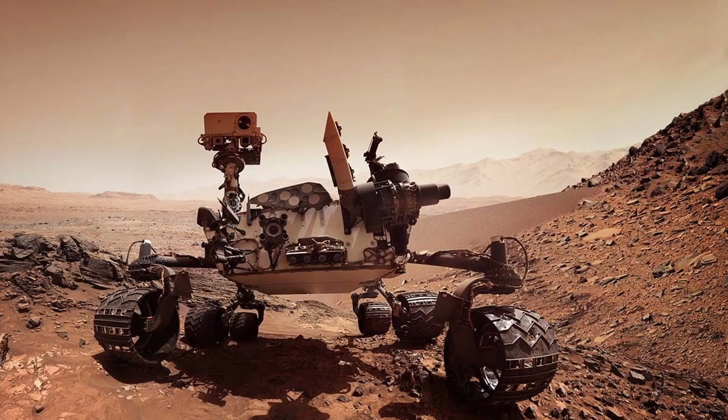Rovers. Everybody knows them, everybody loves them. But how do they actually move from A to B? Let's look into it. Alright, let's say we have a rover standing currently on an arbitrary point A and we want him to move to point B. On a higher level, we can just tell him, okay, go to point B somehow.

But there's a little problem. Let there be a rock in the middle. And now we cannot just drive straight to B. So what we need is continuous processing of our real-time environment, and we always have to weigh between accomplishing our mission goal and reacting to our environment. Also, this has to be instantaneous, so we cannot do it with humans. For example, look at Mars, we already have over 20 minutes of round-trip time for a message.

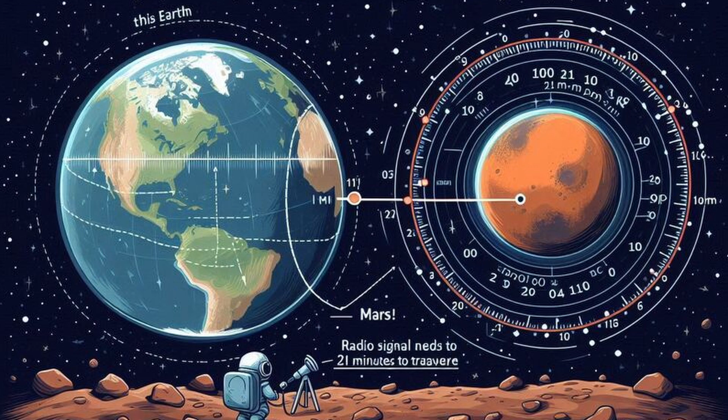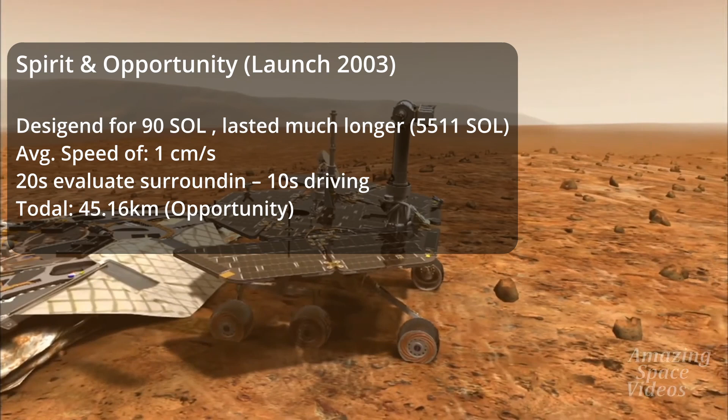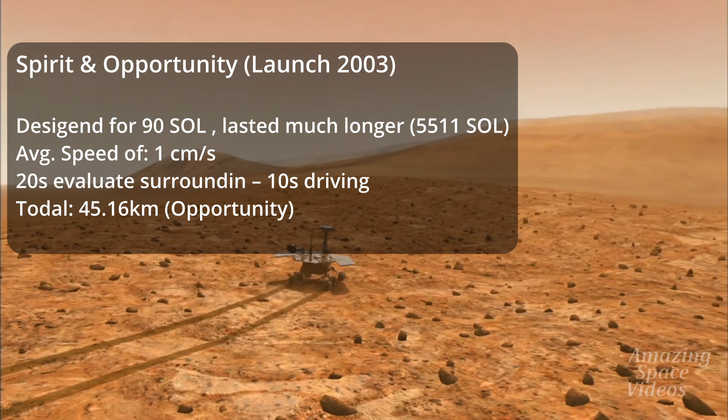Before we go too deep into the topic, let's look at a quick example. Spirit and Opportunity, launched in 2003, were designed for only 90 sols, but lasted much longer, actually over 5,000 sols. They moved with a pretty slow speed of 1 centimeter per second. It was split into two phases. First, they took around 20 seconds to evaluate their surroundings, and then they were able to move for 10 seconds.

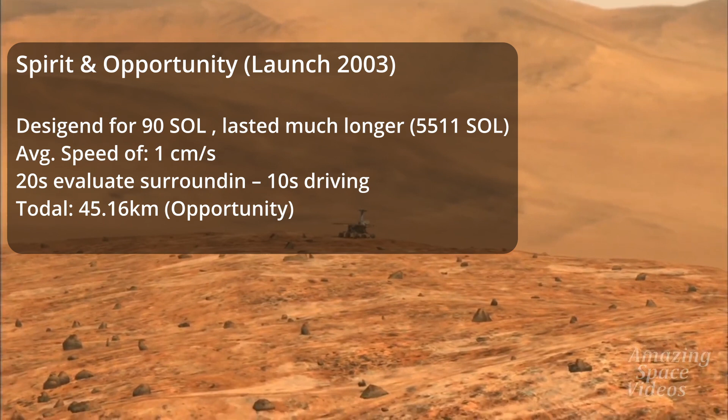And in the case of Opportunity, we actually managed to get to a distance of over 45 kilometers. So the system we design has to be reliable and work in the long term. We will start with the actual steering mechanism on how you can control a rover. First of all, we want to look at skid steering, which is a very basic version of steering. You all know this from tracked vehicles like Wall-E, for example.

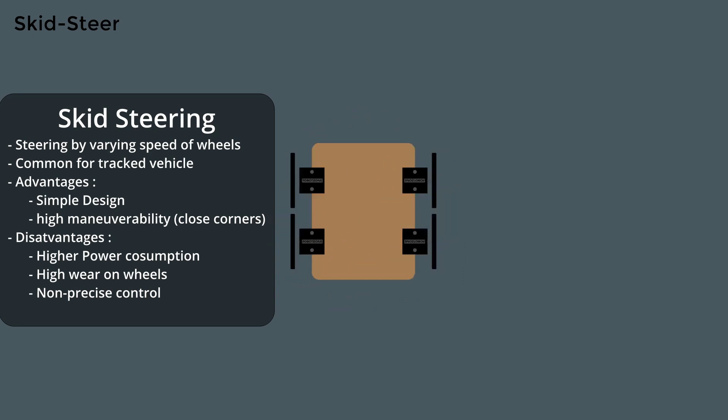What we do here is we steer with how much we actually use which motor. So if we want to do a right turn, we give more power to the left motors and less power to the right motors, or in extreme cases, let the left motors roll to the front and the right motors to the back, so we can do a turn in place. The advantage of this design is that it's very simple and that we have very high maneuverability in close corners because we can spin at one point.

But, and that's a big but for our problem set, we have a high power consumption. Power is rare in rovers. We have a high wear on wheels, which is especially bad because we cannot just go there and swap a tire. We have one tire for the whole mission, so we want to reduce that as far as possible. And also we have not really precise control if we want to go to a very specific point to do a measurement, for example, on the floor. So it works. It also was used in some rovers, but there are better options.

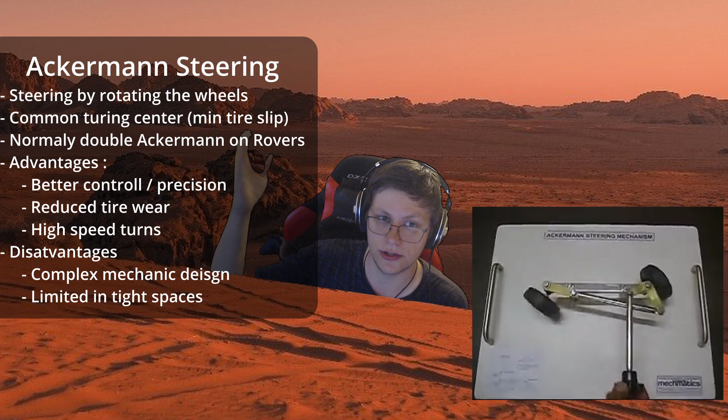The most common option, and arguably better than skid steering, is Ackermann steering. You all know this. Why? Because it is also used in cars. What we do there is we steer by rotating some wheels. Let's look at an example. In the car we have our two wheels on an axle, and if we turn our wheel, the wheels rotate to the left or to the right, and with that we can steer. This system allows us to have a common turning center. This gives us minimal tire slip, but on rovers we have two special cases.

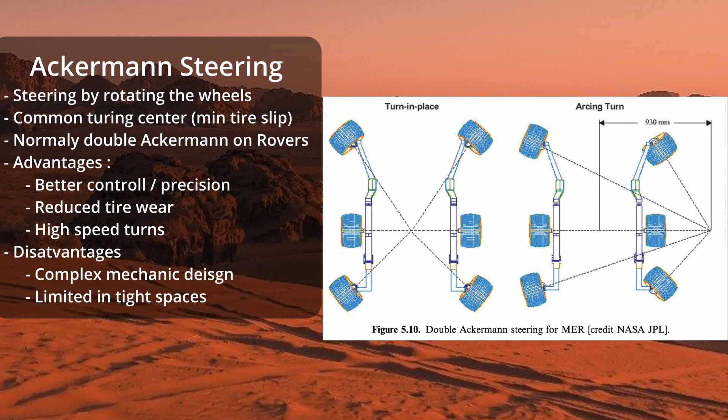First of all, we don't use a normal Ackermann, we use a double Ackermann. So we don't rotate one pair of wheels, we rotate two pairs of wheels, on front and on back. This allows for even better movement and tighter turns. And the second part, as you can obviously see in pictures of rovers, we do not have an axle to connect the wheels. This means we have to simulate something like that in software, but it also gives a very big advantage that we can independently move the wheels and basically rotate around ourselves and put the center of rotation inside of our rover, like seen here.

As already said, the advantages of such a method are better control and precision, way reduced wear on the tires, and very high speed turns. But as obviously seen, it's a little bit more complex in mechanical and software design, and we are a little bit limited in tight spaces. Yes, we can rotate around ourselves, but not as well as with skid steering.

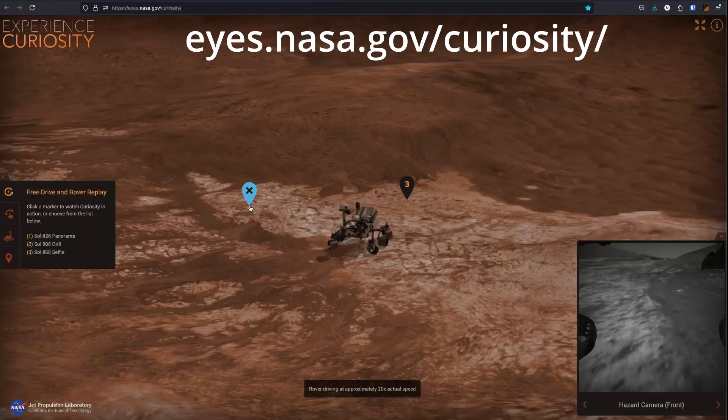Now, if you want to try this out for yourself, there is a very cool NASA website where you can play around with one of their rovers and actually point and click it to a location where it should go. And you can see in action how the Ackermann steering works.

But wait, there's more. As we all know, extraterrestrial terrain is not as flat as a street. So we actually need a mechanism to be able to always stay on the ground and not just fall over. For that, we can use something like the bogie mechanism, which is basically a suspension system with two joints where we separate some of the wheels from each other to be able to keep all of them on the ground when we go up or downhill.

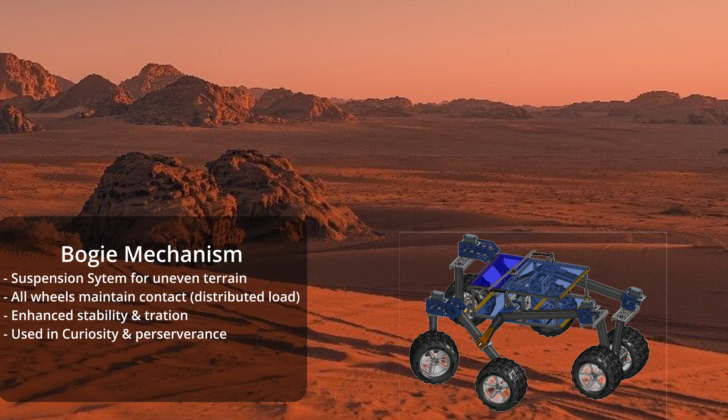It enhances the stability a lot. For example, it was used in Curiosity and Perseverance, and as you can see in this animation, it works actually pretty well. With that, your rover will not just fall over when there is a small hill.

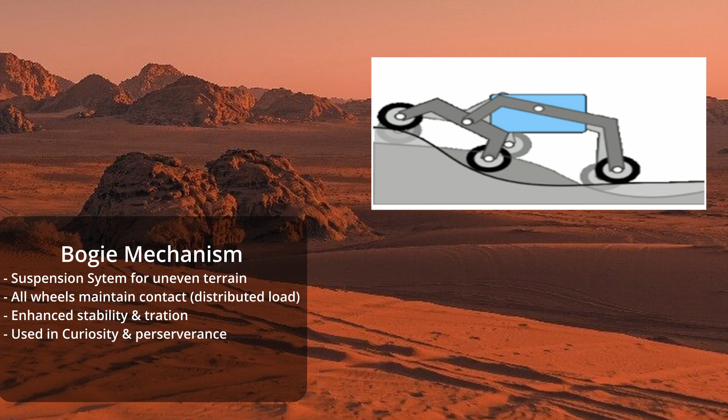Now that we know how the hardware works, let's take a closer look at the software. For that, you should know what a closed loop system is. Basically what we are doing is we take the output of our system, analyze it, and adjust our input according to the error we have in our system. This gives us better accuracy, reduces disturbances from errors, and enhances our stability.

Also important to know is that we have more than one of such a system. Just for controlling our movement, we use one for our speed controller, how fast we are going, and one for our steering on where we want to steer. And also, these are not only used in locomotion, we also use them in temperature sensors and all such stuff. But this is a topic for another time.

The first type of these controllers I want to look at with you is the Bang Bang controller. It was one of the first control software systems that were used. And basically what we are doing is we are switching between minimum and maximum control input. So if we are a little bit too low, we set our input to max to get it back up. And if we're a little bit too high, we set it to 0 to get our system back down.

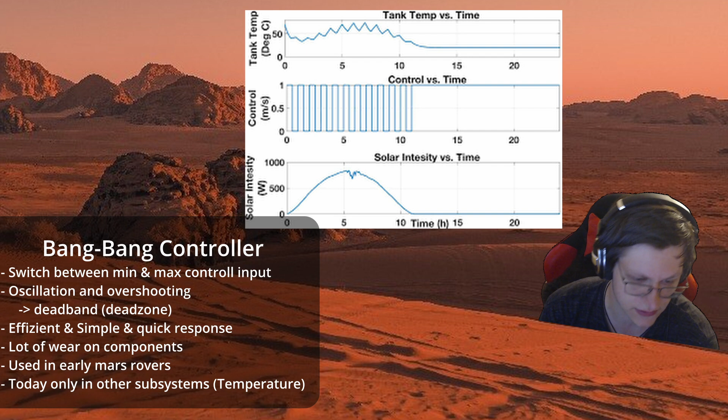This is very efficient and very simple to implement, but has some major drawbacks for our scenario. We have a lot of wear on our components. These maximum minimum control inputs are not really good for motors or any kind of actuators if you want to run them for a long time. And today they're only used for some other subsystems like temperature measuring and no longer for locomotion.

Then we have continuous control, where we always look at our output and adjust it in very small steps continuously. Hence the name. This results in a very smooth and steady movement, and we can handle very small deviations in real time since we are only doing this in very, very small steps.

It has way less wear on the gears and very accurate navigation, but has the big drawback that you need a lot of computational power to compute what you want to do, and it's kind of slow in the response, so it's better but not perfect.

And going one step further to the PID controller, what does that stand for? Proportional integral derivative, where we look into the past, the now and the future. We can look at the current error, where are we and where do we want to be with our output of the system. But also we can integrate over old errors to compensate errors that accumulate over time. So that's our past part.

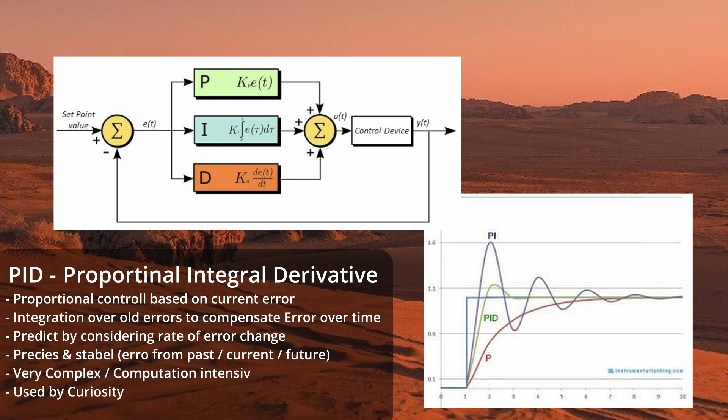And then the third part, where we can look into, is we can predict what our error could be by considering how the rate of error changes right now. This is very precise and stable, but also even more complex and power intensive than the previous one. In the end, this is the system you want to go to for current rovers.

For example, Curiosity uses this. Comparing the power you need to move the wheels and the whole rover to computing the movement, the computing part is negligible. The only important part is that you need hardware microcontrollers on board that are capable of calculating this fast enough, so you can run it in a way that you can proceed with the mission.

Moving to error detection and recovery. How do we even check if we have an error in our system? I mean, yes, we have our sensors and the feedback from them, and we can compare the is and the should. And with that, we can basically set up an error threshold. So we define a space where we have to be around our should, where we say, okay, this is fine, but if we go out of this threshold, we have to do something.

And on the other side, what we can do too is data analysis. So we have to check if a faulty sensor exists, so the values we get from this one will be wrong forever, or if it's a problem in the controller where we can fix it software-wise, or is the actuator broken. So for example, when one of my wheels is broken, I will never be able to move as I should.

And then there's the other part where we cannot recalibrate the sensor or some of our components are stuck. That's what we call an unexpected situation. And this is the point where the autonomy of the rover stops and we actually need a human to interact with it and help to fix the problem. For that, let's look at the worst case scenario.

So, what do we do if we have an unexpected failure in our system? For example, a stone or stuck in sand. First thing we want to do is hold all the processes we are running right now and identify the problem. And with that, we request human interaction, because the rover accepts that it no longer can do anything to better its own situation. And it starts collecting more and more data so people on Earth can analyze the situation as well as possible.

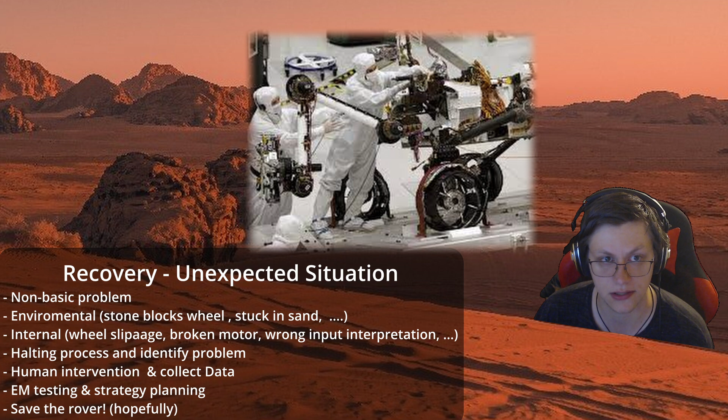And with that, you can start engineering model testing, so basically a replica of the rover on Earth to simulate the situation and see what we can do to fix this and hopefully save the rover.

Let's look into a worst case scenario, the Spirit rover. 2009, the rover was about 6 years on Mars at that point. The rover drove over a not so stable crater and broke into it. And in there was a lot of sand. And basically what happened, the whole rover was stuck in sand and could no longer move forward.

People from NASA tried to save the rover and did a lot of calculations. After 6 months, they tried the first rescue, but they could only move the rover a few millimeters. At that point, another problem was adding to this bad situation. The Martian winter was coming, so basically less and less sunlight for the rover, less and less power to do

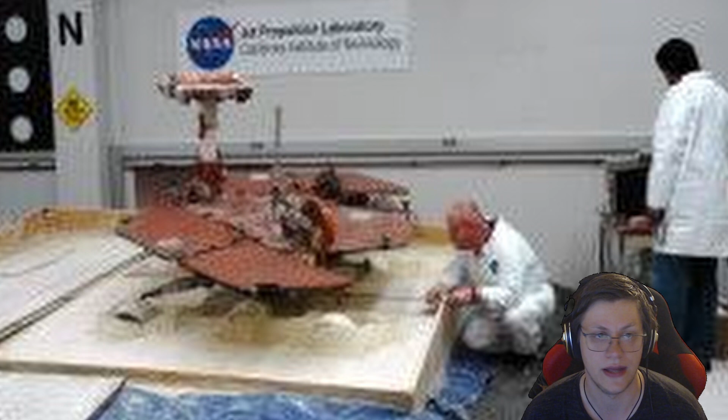stuff. So at one point it was decided to make the best out of the situation and use the rover as a stationary science lab to do as much science as possible. And the last locomotion thing that was done on the rover was to move it a few millimeters, just to get a little bit more sunlight on the solar panels to get more energy into the system to do experiments.

Again, this is a worst case scenario. Normally you have a high chance to fix such problems, but in this case we only had 4 working wheels left, and we have a rover that was like 6 times as long in active duty as was planned. So I personally still see it as a win that we can use Spirit as a stationary science platform at that point.

Okay, but now to a bit more fun part. Let's talk about odometry, which basically is the science of knowing where you are without external input. On Earth that's easy because we have great inventions like GPS that can pinpoint to centimeters where exactly we are, but we do not have such a system on Mars or any other planets, moons, or wherever we want to send our rover next. So we need to do it in another way.

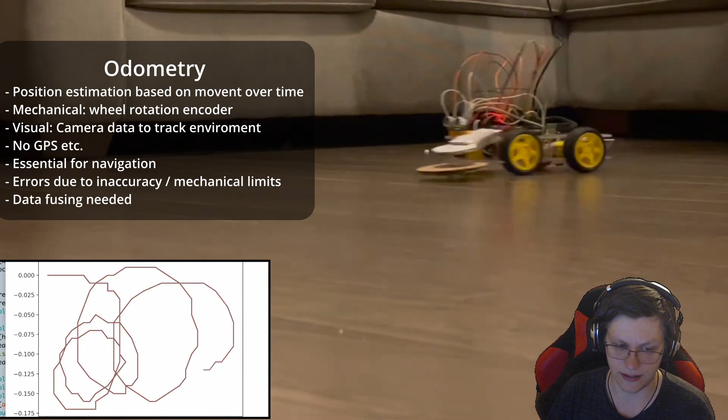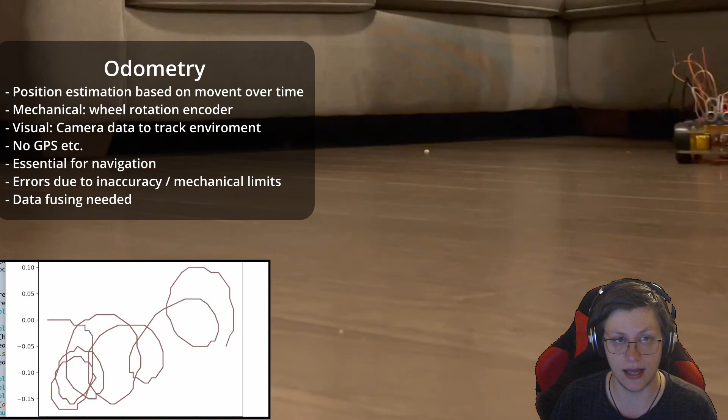The simplest solution for that is mechanical odometry, which is basically putting rotary encoders on the wheels, collecting data on how much the wheels turned, and calculating from that where we should be. This has some major flaws, like slipping in sand or not reading the data right. All that can happen.

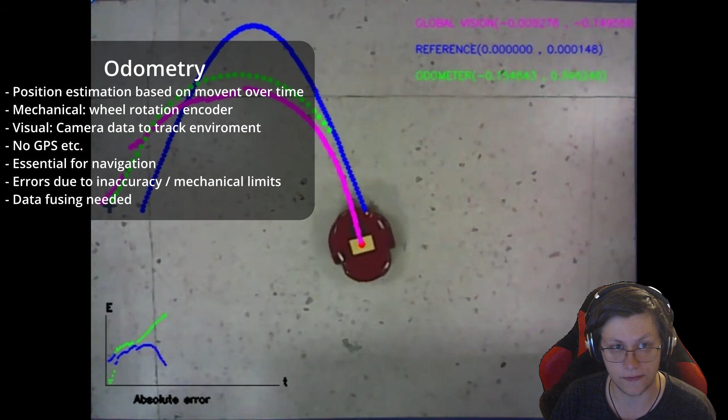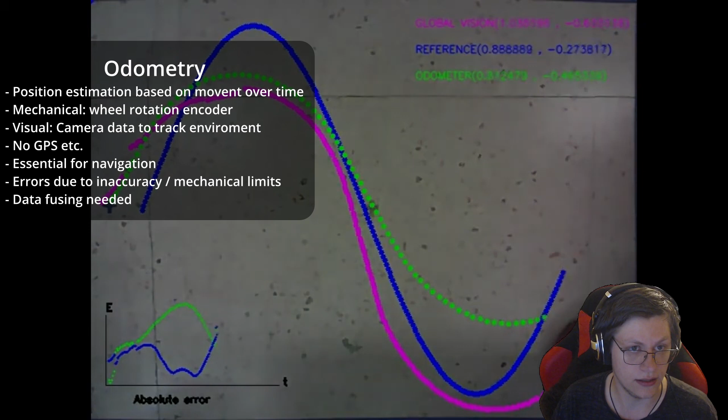And for that, we can use visual odometry, where we take pictures of the surroundings with onboard cameras or other methods of data. For example, a LiDAR sensor would be a good indicator, and use this data fused together with the mechanical odometry to get a better idea of where exactly we are.

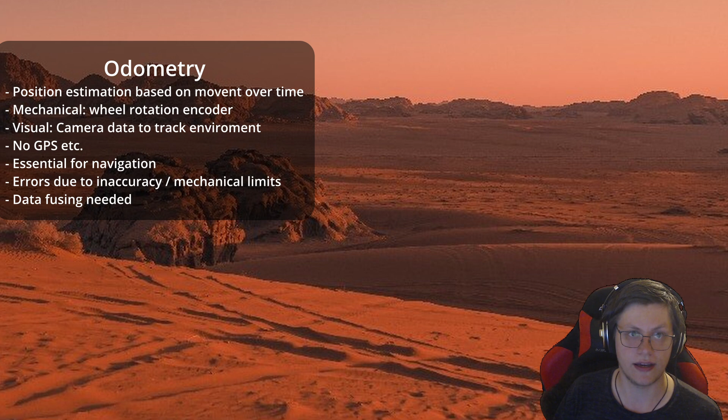In some cases, at the current point in development, what you can do is actually build distributed systems where you can use a rover on the ground and a satellite in the sky together to get an even better location without needing a full GPS system, but only one satellite that takes pictures.

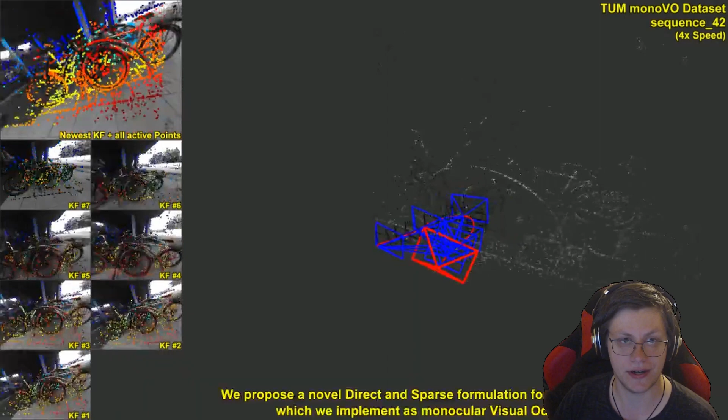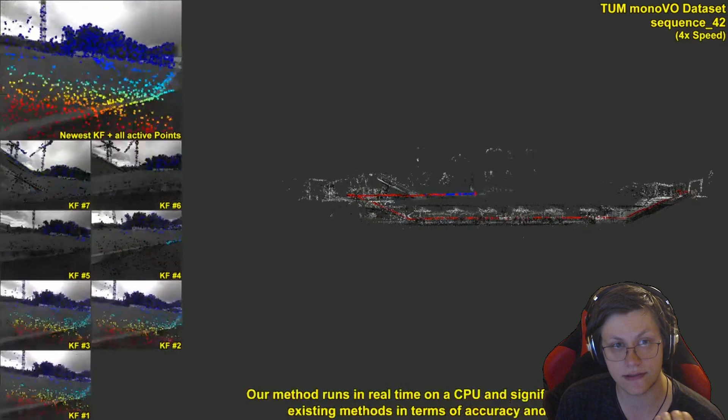And moving one step further, we can use the data we collected with odometry to build point clouds. So we can map our surroundings, where is a stone, where is a cliff, stuff like that, and save it as a 3D mesh. This has some big upsides. For example, if we ever go back into this territory, we already know where we can and can't go and can route our way through the area way more efficiently. It's also interesting for possible later landings to see where is a good surface to land.

And also, if for some reason we lose connection and the rover is moving around, we can use this mesh to estimate our position right now compared to the landmarks around us.